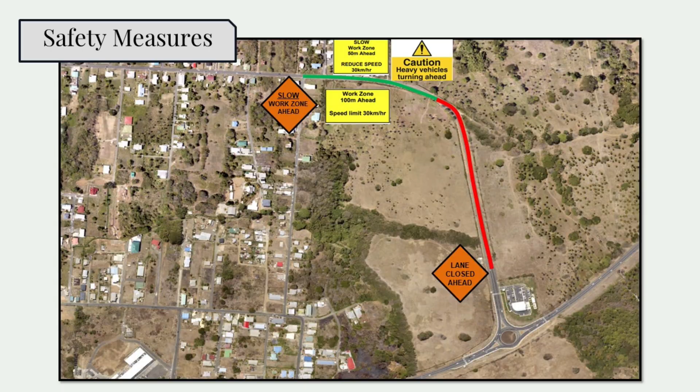And I'm thinking of your larger vehicles, for example PTSC buses, because that's a route—are they also going to be using this alternate route? Well, not necessarily. What will happen is that during construction we will have wardens by the one-way giving way to emergency vehicles and the larger vehicles.

I don't know who would want to speak about some of the technical aspects of this project, in terms of utility posts or relocation of some of the infrastructure that is already there. Well, Atiba could get into the technical stuff, but a key part of this project is stakeholder engagement. We took the time and effort to engage all utilities and the residents that will be directly impacted by the project, so that they won't be caught unawares. Even in the case of WASA, we will be doing a lot of road work, so the heavy equipment, the roller and the compactors will be operational, and the line may erupt.

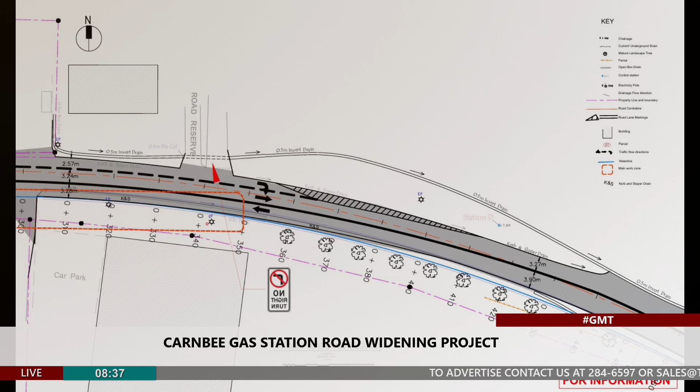It may erupt, but in the case that it does, we are in constant communication with WASA so we could get a quick fix. The guys at WASA said they could do a repair within a day. Yeah, of course they can.

It's good to know that all these conversations are taking place, because the goal is to have a positive outcome and a smooth flow.

This image shows an illustration of what the widening would look like at ground view. To your left you would see the utility pole, then the sidewalk we established, and then the 3 lanes that would essentially exist at the major part of the project. The size of those lanes would be 3.2 meters, and the one which is essentially the entry lane for the gas station would be roughly 2.5 meters. All of that happening within the road reserve.

I also want to say that we tried to keep the scope of the project limited in terms of the widening that we would do. We kept it below the EMA requirements, and we've maintained that so that the project could move forward as quickly as possible while still achieving the objective. I think we were able to accomplish that.

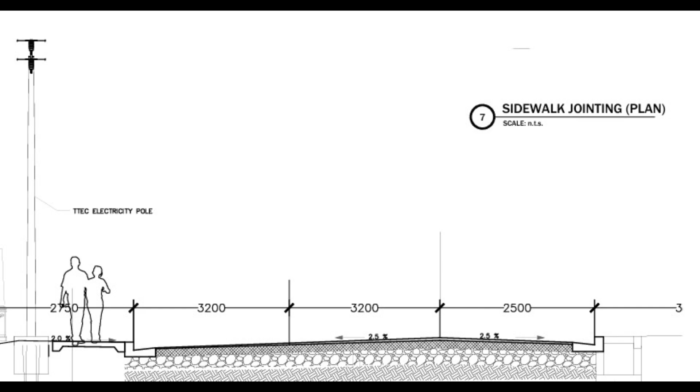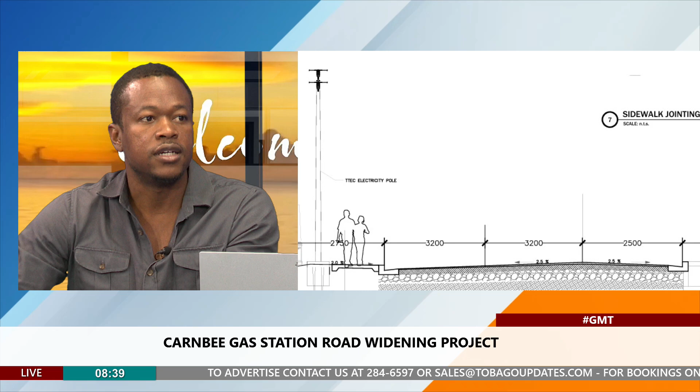And one of our other concerns that we wanted to ensure that we didn't have was too much disruption, because of course it's a busy area. We really wanted to contain the scope of the project. So it's about 200 meters long, the scope of the work, and we achieve a maximum widening of about 1.7 meters from where it actually is right now. So it's not much that hopefully would be impacted in terms of the changes we are going to be making. We hope to get out of there as soon as possible so that business activity and traffic could run smoothly in the shortest possible time.

And as we look to wrap up, gentlemen, I just want our viewers to know how can they keep abreast of what's going on with this project, if there are additional changes, or just to be reminded of the alternate routes. Where can they get additional information and updates as this project begins? If the public has a concern they would like addressed, they can reach out to the project management office in the Division of Infrastructure, Quarries and Urban Development. That number is 635-1506. For updates, the division's Facebook page will send out regular updates.

Right, it's a fluid project. We have to do on-site observations as we roll out, and we may make some alterations. When we do make those alterations, we would put out notices on Facebook and through the mainstream media. We'll give regular updates. If we have to close a street or restrict movements on a street, we would put out the requisite update and keep the public informed.

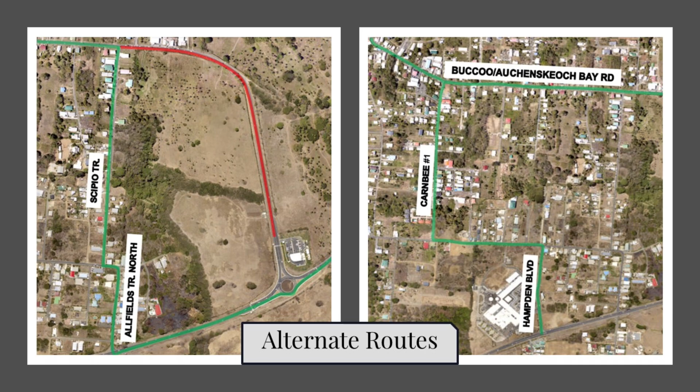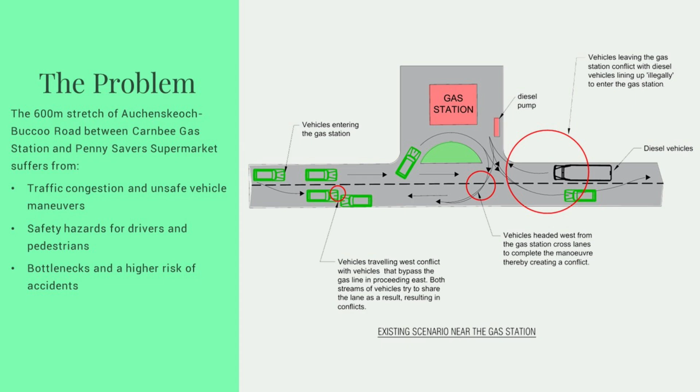So viewers, those of you, especially if you are living in that area, it's your responsibility to ensure you look for the information. I know many times we accuse the government, THA, at whatever level, saying we didn't know and they didn't tell us, when oftentimes some type of communication was released. So keep your ears on the ground, keep abreast of what's happening so you can make additional plans and not have your life really disrupted.

And again, the project is supposed to begin from next week. Well, I guess mobilization has already begun, right? And we are keeping our fingers crossed and saying our prayers that it will finish with the targeted end date of the end of this month, August, so that school and the traffic that usually ensues with that period will not be that interrupted or become too stressful for those of us who use that area.

So I don't know if there's anything I may have left out that you may want our viewers to know, or did we cover it all, gentlemen? Well, I think we covered everything, but we'd just like the public to know that the expected outcome of this project, our objective, is to improve traffic flow in the area, to enhance safety, and to improve the economic fortunes of the businesses and the proposed businesses that will come into the area.

And I saw one of our viewers commenting that they should just move the gas station, but you don't just want to interrupt business like that, that's not how they operate here. It may seem as though that's just the issue, but you have other businesses as well, and the traffic will continue. So it's good that engagement took place, and it's not a case of just getting rid of the gas station as the seeming solution, but really dealing with the issue and improving the area for those who are using it and those who are living there.

It's a brand new morning, rise up to a brand new dawning as the passion starts to rise. The energy fills the sky.